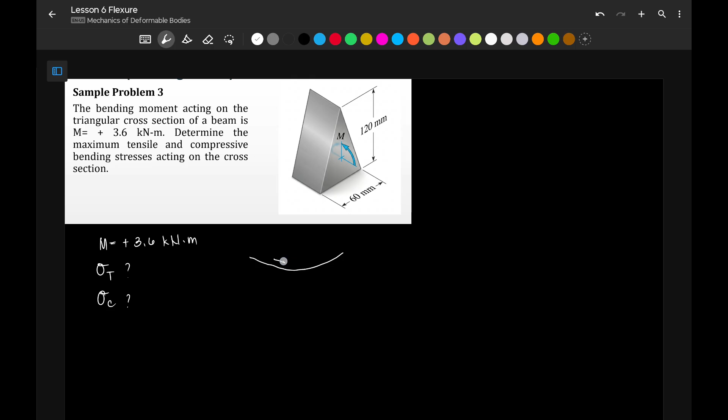So what we're looking for is the maximum tensile and maximum compressive stresses. Since our moment is positive, our beam tends to smile. So the fiber on top is under compression, and the fiber at the bottom is under tension.

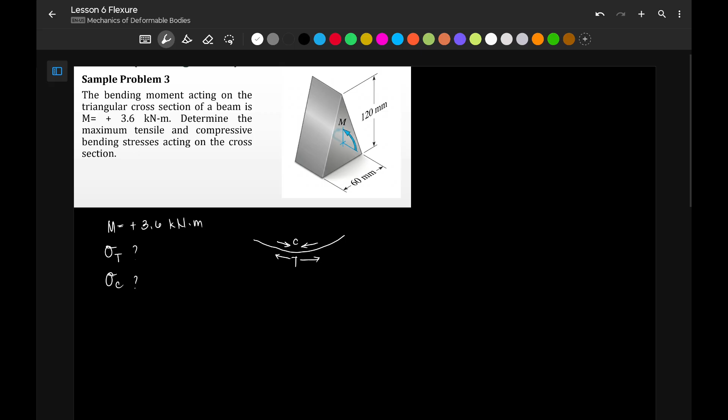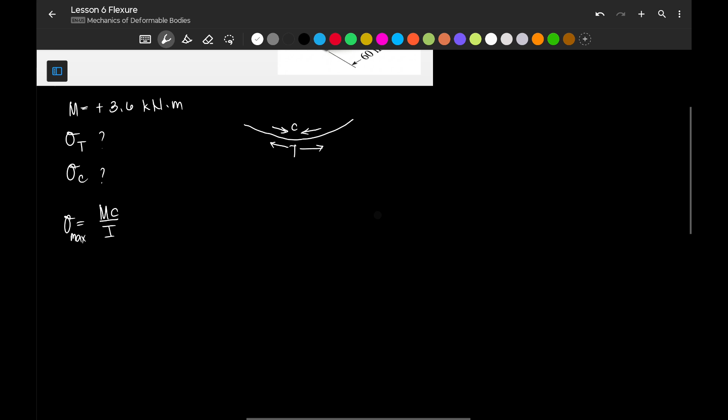Our cross-section is a triangle. So the formula for stress is simple, that is just MC over I, since we are talking about maximum stress. So let's get our I and our C for the triangle.

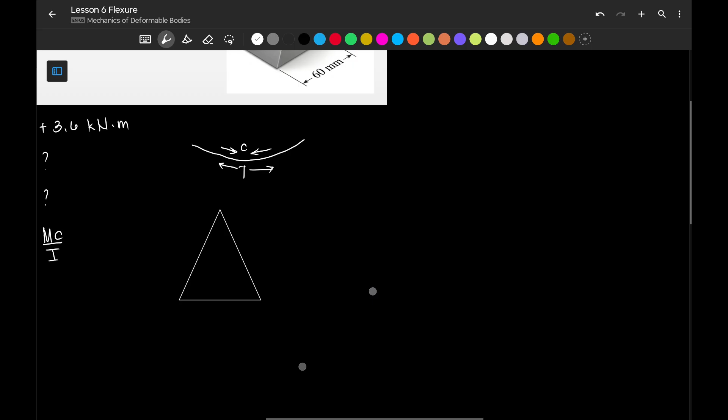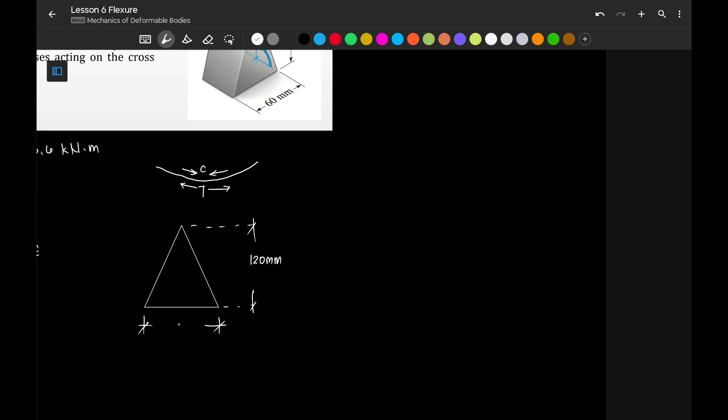So this is our triangle. The height of our triangle is 120 mm, whereas our width is 60 mm. Now, based on our understanding of centroids and moment of inertia, we know that the centroid of this triangle, which is our center of mass or center of gravity, is located at 1/3, 2/3 - 1/3 coming from the peak, so this is 1/3 of the height, and this is 2/3 of the height.

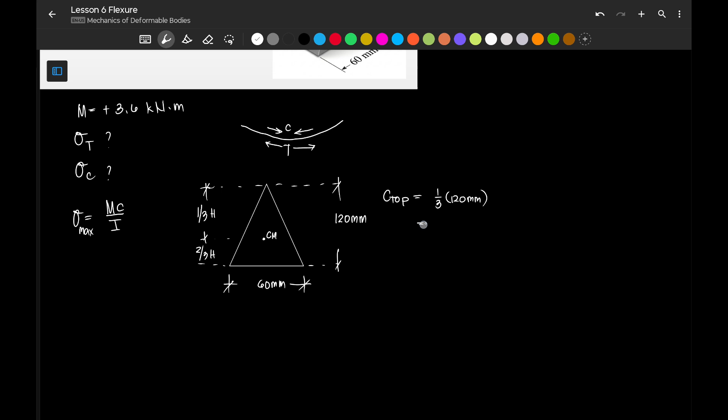Therefore, our C-top is 1/3 of 120 mm which is equivalent to 40 mm. That is our C-top. And then our C-bottom will be the 2/3. Wait, I switched them - so this is the 2/3, this is the 1/3. So this should be 80, and this one is 1/3 of 120 mm. Why did I make the bottom larger?

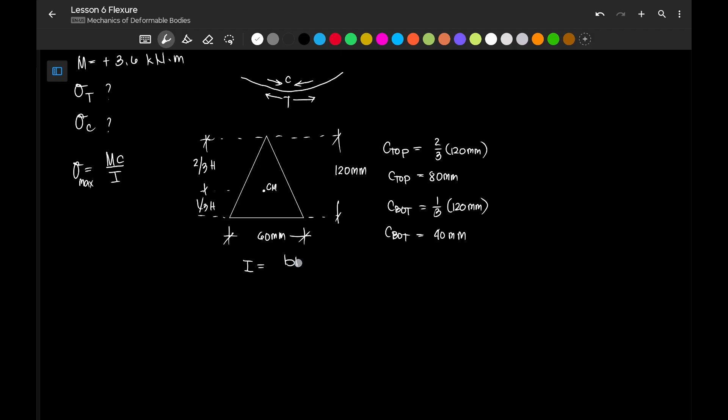So C-bottom is just 40 mm. Okay, let's get our I. The moment of inertia is BH cubed over 36. So the base is 60 mm multiplied by the height of 120 mm cubed, over 36. So our I will be 2.88 times 10 raised to 6 millimeter to the fourth.

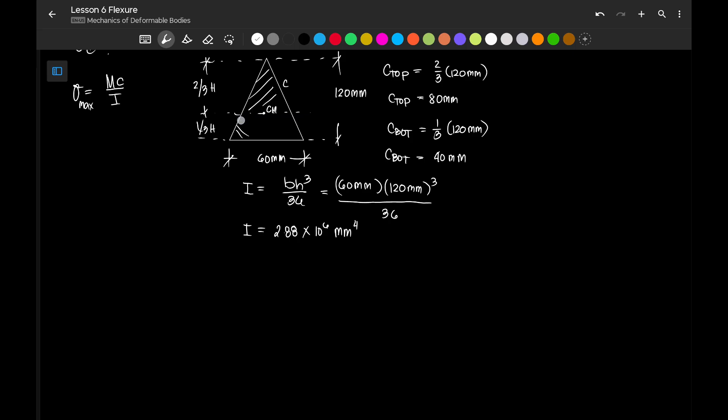So when we're asked about stress, since our stress calculations will be separate, this will be split into our top fiber which will be under compression, and our bottom fiber which will be under tension because our bending moment is positive. So let's start with the top fiber. On the top fiber, our stress becomes...

The moment is 3.6 kN-m, we multiply it by 10 raised to 6 to convert to newton-millimeter, multiplied by our C-top which is 80 millimeter, divided by our I of 2.88 times 10 raised to 6 millimeter to the fourth. Cancel the units, millimeter squared remains, newton per millimeter squared, that is megapascal. Let's remove the times 10 to 6. So what's left is 3.6 times 80 over 2.88.

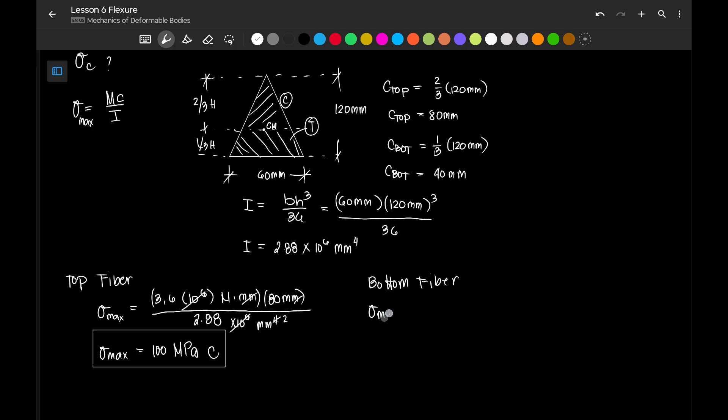We have 100 megapascal, and that's under compression for our top fiber. Now for the bottom fiber, our maximum stress becomes - we just change C. We don't change the section, and we don't change the moment, so we only change our C.

So this time our C is 40 mm, divided by 2.88 times 10 raised to 6 millimeter to the fourth. After cancellation of units, it becomes millimeter squared. Let's remove the times 10 to 6. So our maximum stress becomes, since it's like halved, 50 megapascal tension.

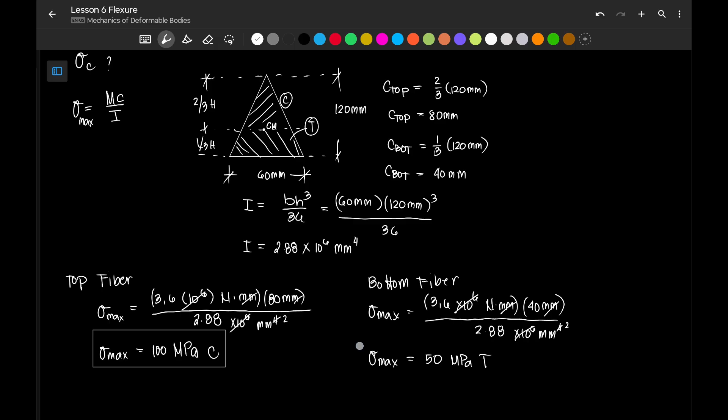So that's how simple this problem is. What's important is to remember the formulas for moment of inertia and centroids, and the location of centroids - that's very important for this topic. Alright, that's it for this one. See you on the next one.

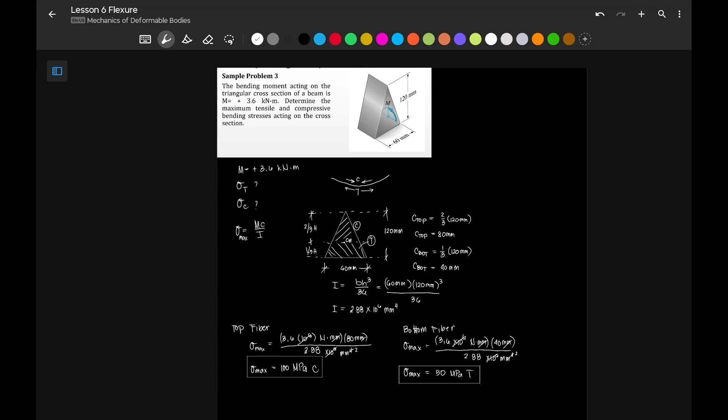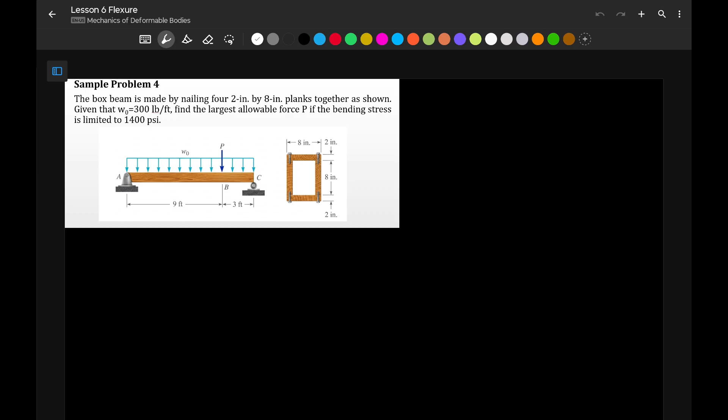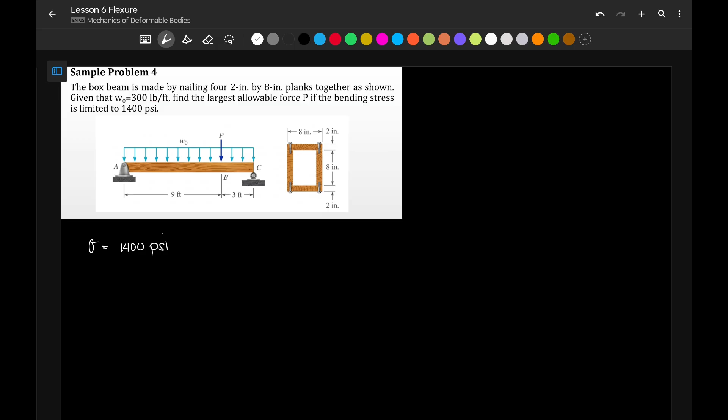Final sample problem on flexure. It says here, the box beam is made by nailing 4 2-inch by 8 planks together as shown. Given that w0 is equivalent to 300 pound per feet, find the largest allowable P if the bending stress is limited to 1,400 psi. The problem doesn't indicate if this is for tension or compression, so let's assume it's applicable for both. So we have a box cross-section.

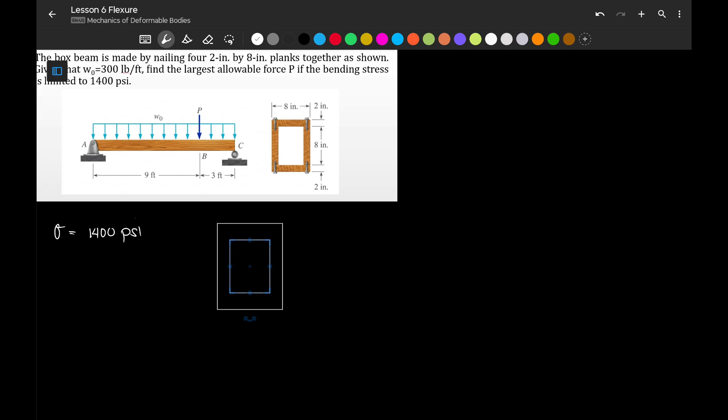Okay, so this is our cross-sectional area. Since our box is symmetrical, our neutral axis is at the center. So let's identify the dimensions we have. Coming from the top to the neutral axis, the distance is half of 8 inches, which is 4 inch plus 2 inch, or 6 inches. So at the bottom, it's the same, 6 inches, since they're symmetrical. On this side, we have 8 inches.

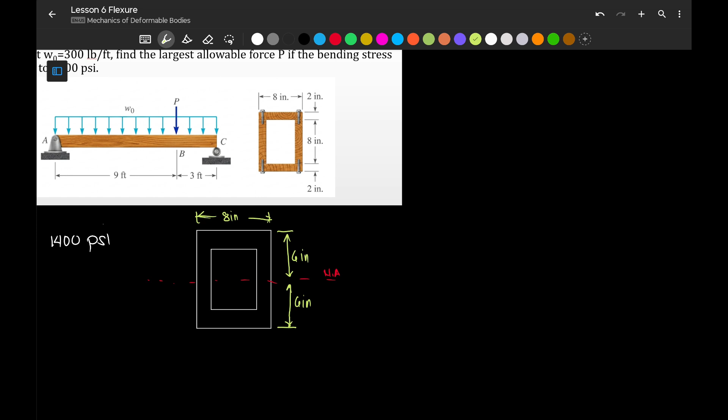Okay, so this is the dimension of the box, and the interior of our box, if this is 8, each window here is 2, this is also 2. So what's left inside is 4 inch, since we subtract two 2's. And the height of the interior will be 8 inches. Okay, that's given by the problem. This is 8 inches up to here, but this one here, that is 8 inch minus 2, that's 4 inch.

Okay, so let's get the value of C. The value of C is equal on top and bottom, 6 inches. Now for the moment of inertia, this is BH cube over 12.

But since it's hollow, we need to get the whole section, then subtract the BH cube over 12 of our hollow section. So in this case, our I becomes: the base of the largest rectangle is 8, the height is 12 cube over 12, minus the small hollow inside, which has a base of 4 inch, and a height of 8 inch cube over 12.

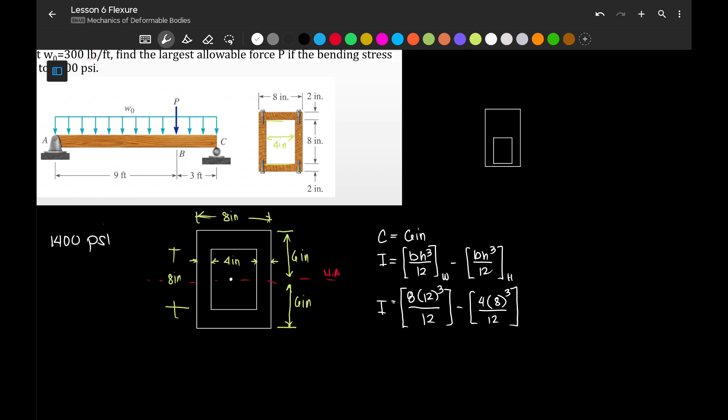So we can't use this technique. We need to use the transfer formula. Our transfer formula is: moment of inertia is equivalent to the summation of I plus A D squared. So we need to use that to determine the moment of inertia. In this case, they're aligned at a single centroid. So our I is

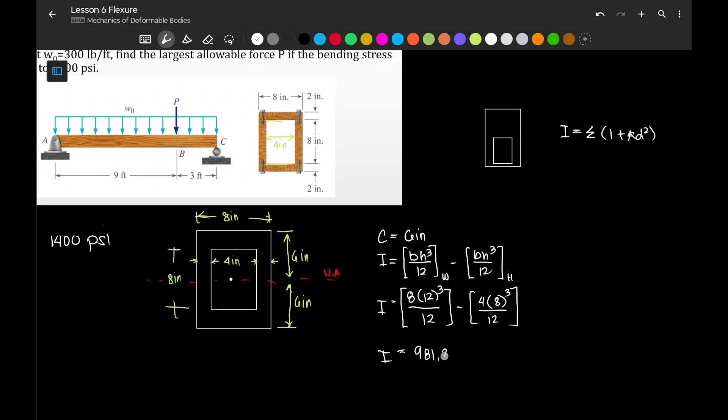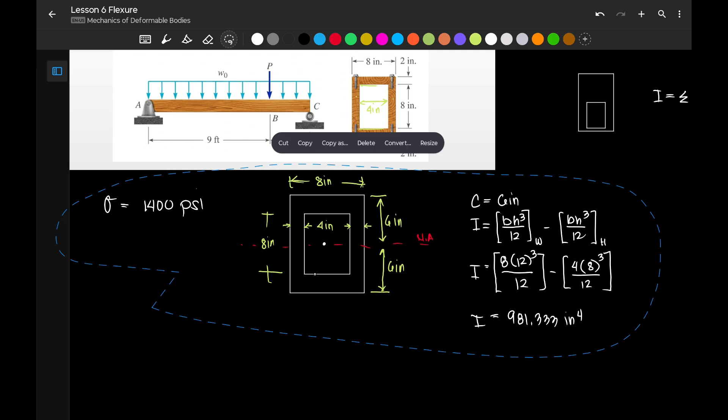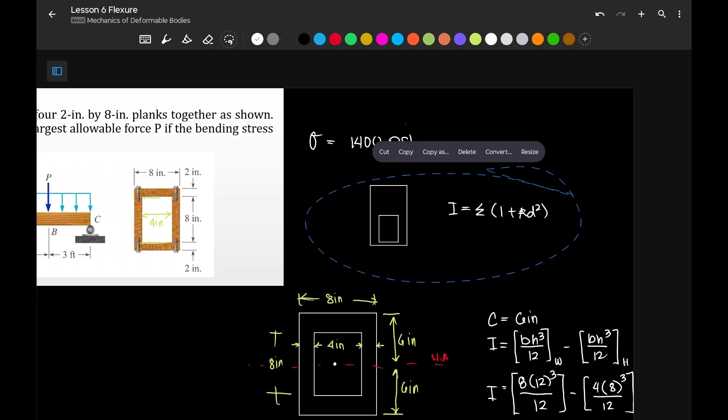Let's move this here. So this we can delete already. Okay, so let's draw the moment diagram starting with our shear.

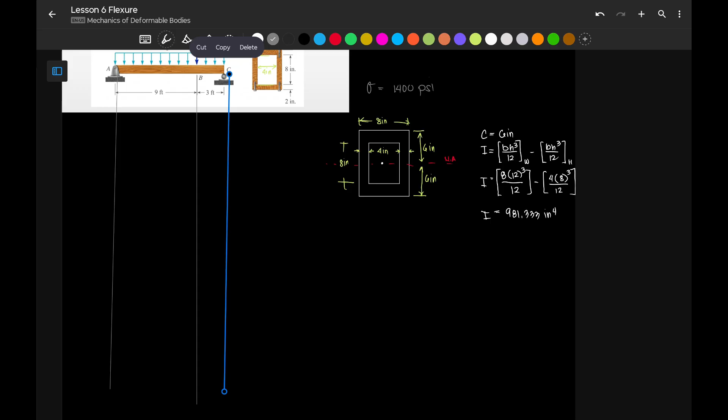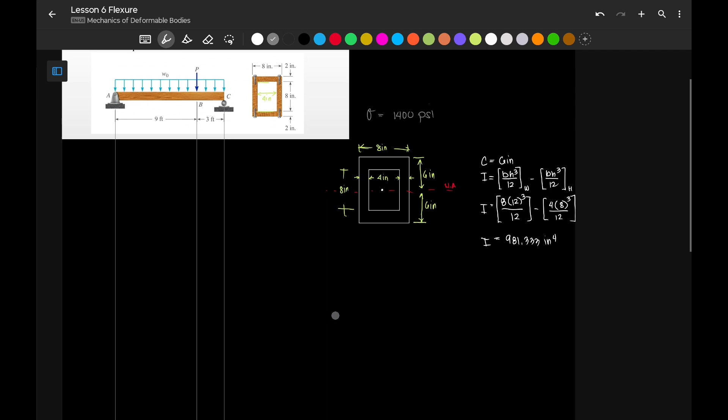Okay, but before we can proceed with the shear, we need to first find the reactions here. What are the reactions at our supports? It's simply supported, and our uniformly distributed load is 300 pounds per foot. So let's solve for the reaction.

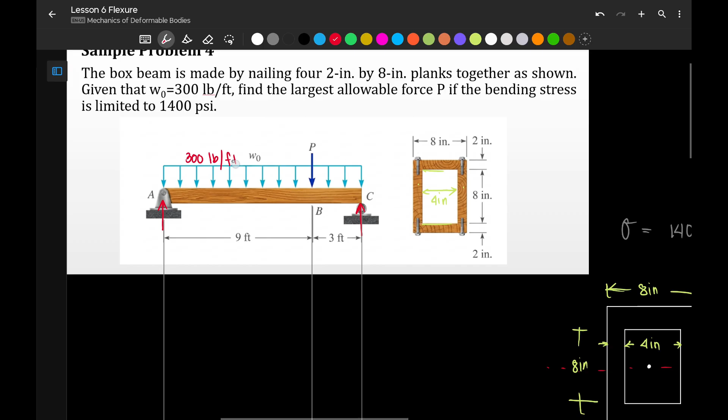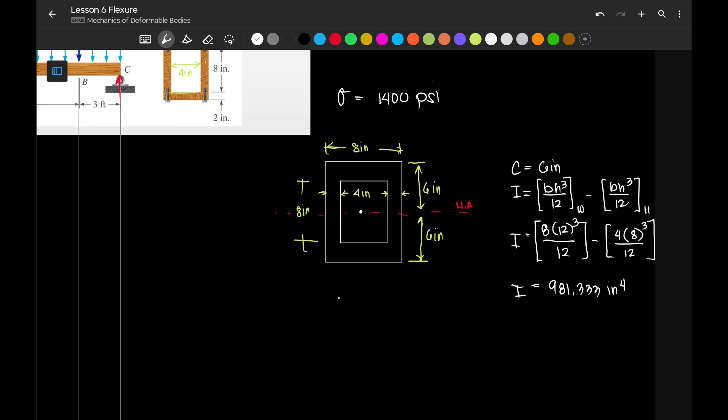Let's take summation of moment at A. I'll place it up here. So let's take summation of moment at A equivalent to 0. Okay, let's assume that clockwise is positive. So what we have here, we have P with a moment arm of 9 feet, plus we have 300 pound per foot, multiplied by its length of 12 feet, then its moment arm is half of 12, so 6.

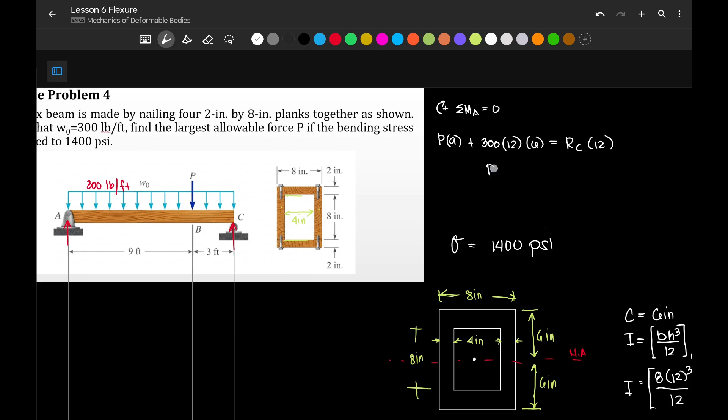And that is equal to the reaction at point C multiplied by 12. So our reaction on C is... Okay, so P is still unknown since that's what the problem is asking for. So what we can do is make cancellations, 9P plus 300 times 12 times 6, that is 21,600, divided by 12. So the unit here is pounds.

So let's simplify. If you have 9 over 12, that would be 3/4. So the reaction here is 3/4 P plus 21,600 divided by 12, which is 1,800. Positive, so they're both positive, but again, this is just the reaction so far.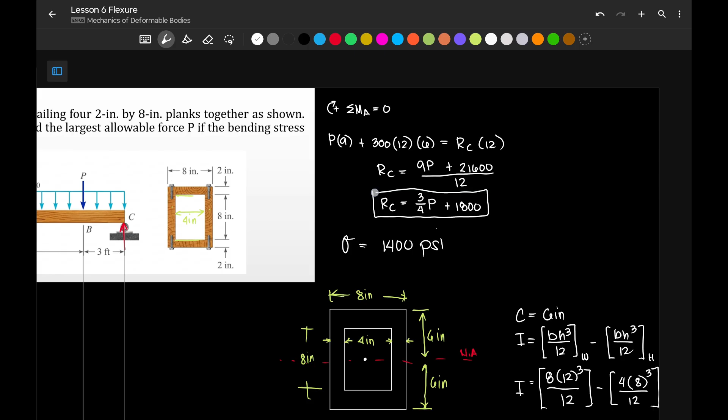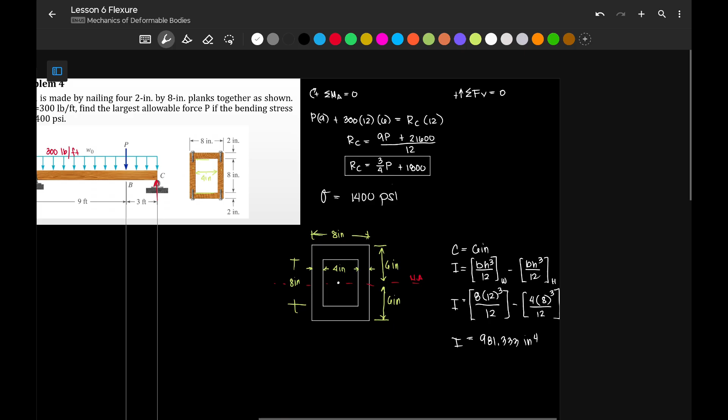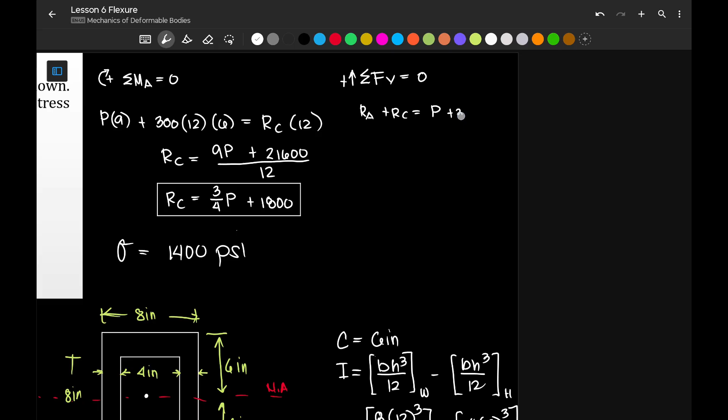Okay, so to determine the reaction at A, let's take summation of forces vertical equivalent to 0, assuming upward is positive. So our upward forces there are RA and RC. So RA plus RC equivalent to the value of our concentrated load P plus the 300 with a length of 12 feet. So what's left for us, since we already have the value of RC, RA is equivalent to P plus 3,600.

P plus 3,600, then isubtract natin yung value ng RC which is 3/4 P plus 1,800. Importante ang parenthesis dito, kasi pag walang parenthesis, magiging plus yung ating 1,800. So our RA is P minus 3/4, this is 1/4 P. 3,600 minus 1,800 magiging plus 1,800. So this is our reaction for A.

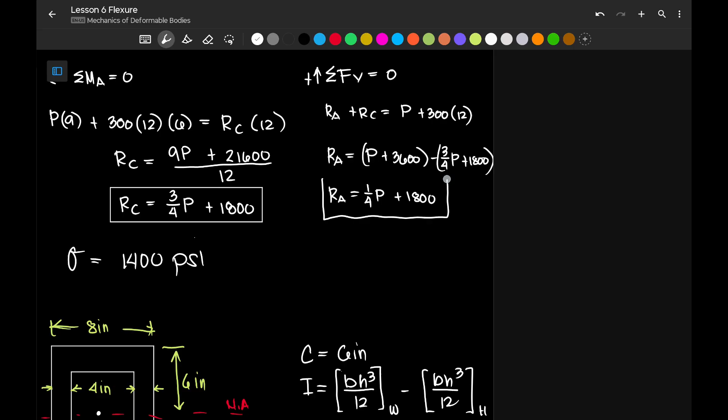Basically, ang nangyari lang, yung uniformly distributed load, pinaghatian nila, tig 1,800 sila. Pero pagdating kay P, si point A, ang kinikerry lang niya ay 1/4 nun, while si RC naman, si point C, ang kinikerry naman niya ay 3/4 nun.

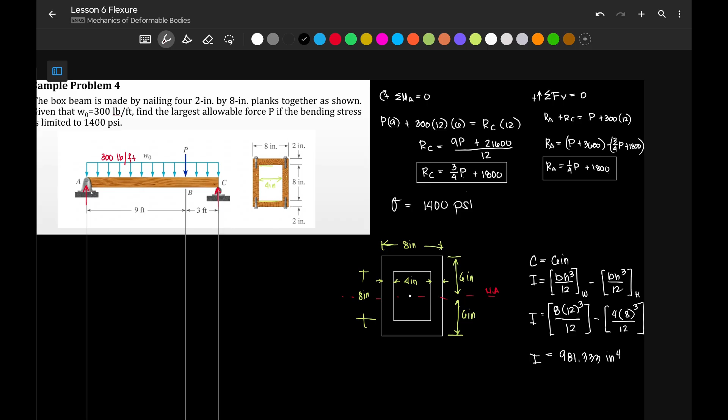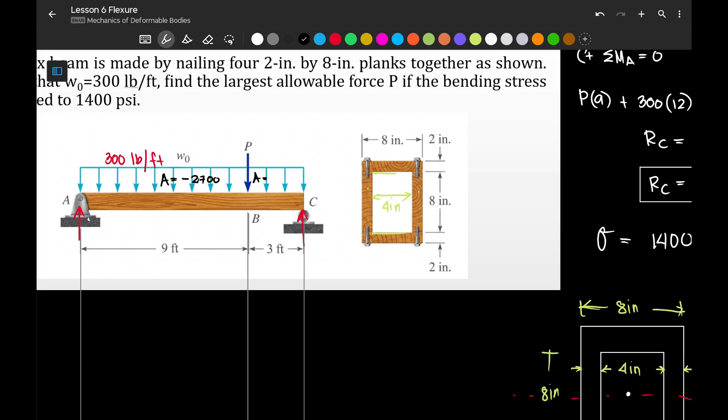Okay, so from here, we can now plot our shear diagram. Kunin natin yung area. Yung area sa point na to, sa 9 feet lang, 300 times 9, we have negative 2,700 dito. At yung area naman sa side na to is 900, negative 900.

Shear diagram tayo muna, SFD, shear force diagram. So our length is in feet, then our shear is in pounds.

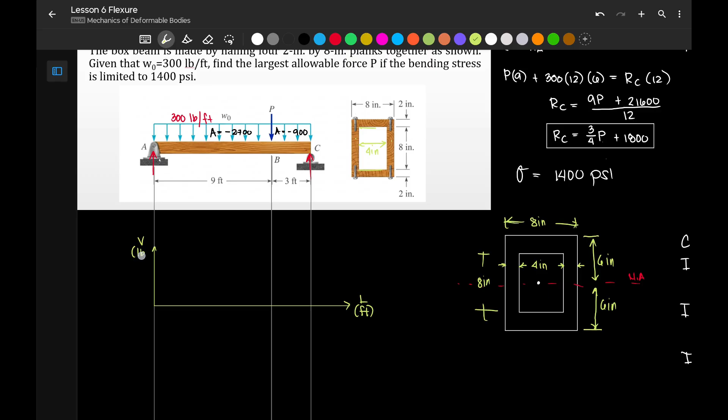So at point A, may reaction tayo, positive 1/4 P plus 1,800. Hindi natin alam yung value ng P, pero that is greater than 1,800. So assume na lang tayo na nandito, this is your 1/4 P plus 1,800. So aangat yung ating shear diagram to this point.

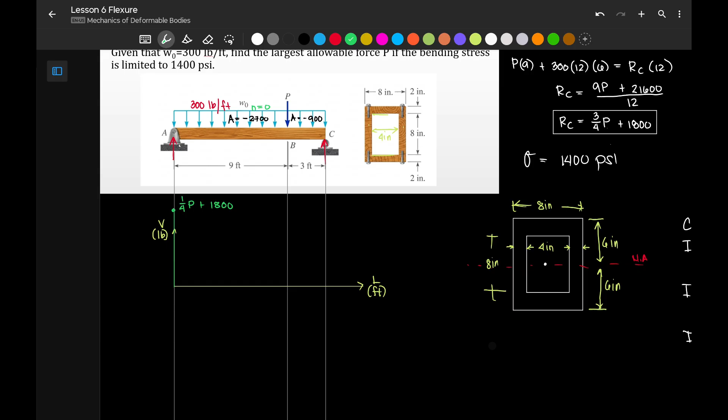Next, degree here is 0, so we can expect that the next line is a slanting line. So the area is 2,700. 1,800 minus 2,700, that is negative 900. So ang shear natin sa point na to, sa point B, shear at point B is 1/4 P plus 1,800, tapos meron daw tayong change na negative 2,700. So the shear at point B is just 1/4 P minus 900.

Hindi natin alam kung mas malaki sa 900 yung 1/4 P, kasi kapag yung value ng P natin ay greater than 3,600 pounds, ibig sabihin positive. Pero kapag ang value ng P natin is less than 3,600, negative. So hindi natin muna alam yung value. Ang gawin na lang muna natin, i-assume lang muna natin na greater than 3,600 yung value ng P. So positive yung magiging result.

So nandito, so we have here 1/4 P minus 900. Let's connect the dots. So this is 1/4 P. At exactly point B, bababa daw tayo ng P, so kunin muna natin yon. So at point B din, meron tayong 1/4 P minus 900.

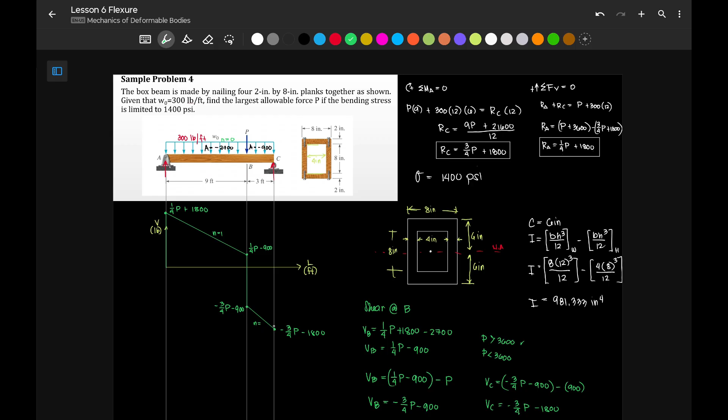We have here a degree of 1, N is equal to 1. At point C, may reaction RC tayo, which is 3/4 P plus 1,800, closing out our shear diagram. So ito na yung ating shear diagram.

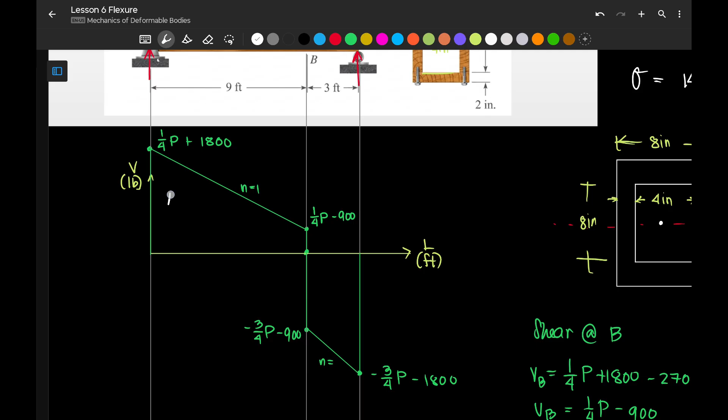Ngayon, itong point na to, this is the location of zero shear. So possibly nandyan yung ating maximum moment, kasi ito positive moment, ito negative moment. Kunin na lang muna natin yung area nito, what will be the area of this one and what will be the area of this one. Yung area nito, ng left side, kunin natin.

Yung area ng left side natin becomes, this is a trapezoid. So 1/2 ng, ang height natin on the left side is 1/4 P plus 1,800, plus yung height naman natin on the other side is 1/4 P minus 900, multiplied by our length na 9 feet.

So, therefore, our area on the left side is 1/2 of 1/4 plus 1/4, 1/2 P plus 1,800 minus 900. So, positive tayo, multiplied by 9. So our AL is 9/2 times 1/2 of P plus 900. So this is our area for this one.

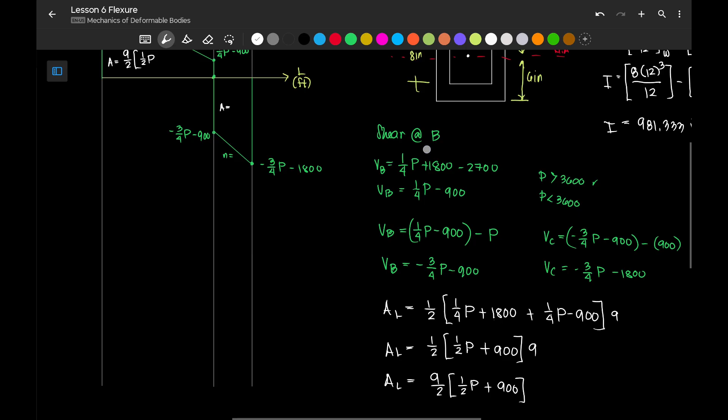So we have 9/2 multiplied by 1/2 of P plus 900. Okay, hindi pa natin kasi alam yung value ng P. Ngayon, actually, pwede na tayong tumigil dito. Meron na tayong maximum moment. Ito na yon, okay?

However, i-check na lang din natin doon naman sa right side. Ano yung magiging area ng ating right side? So the area of the right side would be 1/2, i-remove na muna natin yung mga negatives. Gagawin na lang natin mga positive muna ito para nang sa ganon, hindi tayo mahirapan. Ilabas na natin kaagad yung negative. So lahat ng minus na to magiging plus. We have 3/4 P plus 900

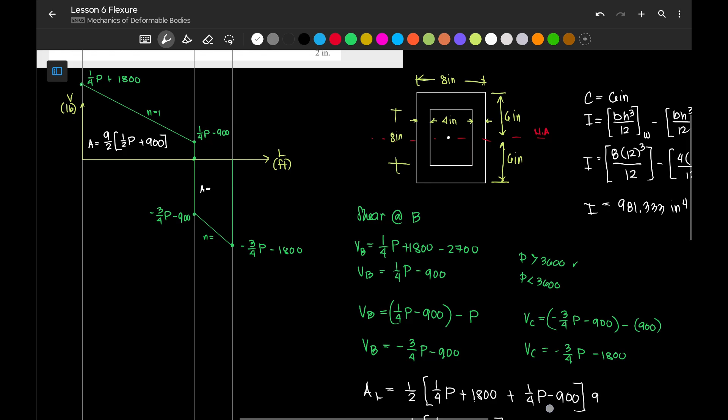plus we have another 3/4 P plus 1,800 multiplied by the length na 3 feet. So our area on the right is negative 3/2 of two 3/4, that is 6/4 P plus 2,700. So this is the area on the right.

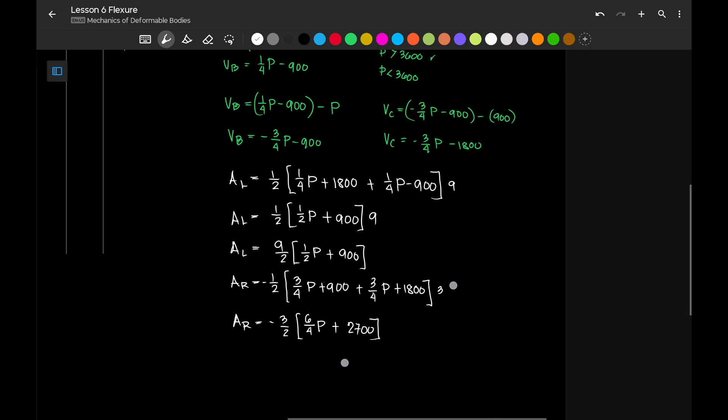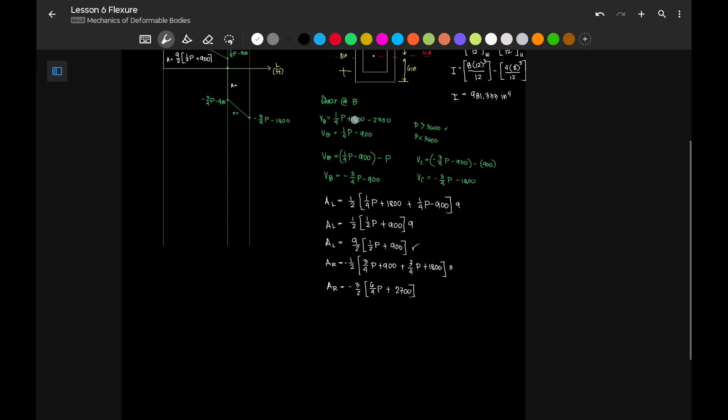Supposedly, this should be equal pero hindi na natin to ipoprove. We are now okay to use either one of the two. Okay? So kunin natin ngayon yung ating bending stress. So since dito yung maximum moment natin, pag i-drawing natin yung moment diagram, kung nakuha nyo na yung maximum moment, kagaya nito, nakuha na natin yung maximum moment, hindi mo na sana kailangang i-drawing yung ating moment diagram.

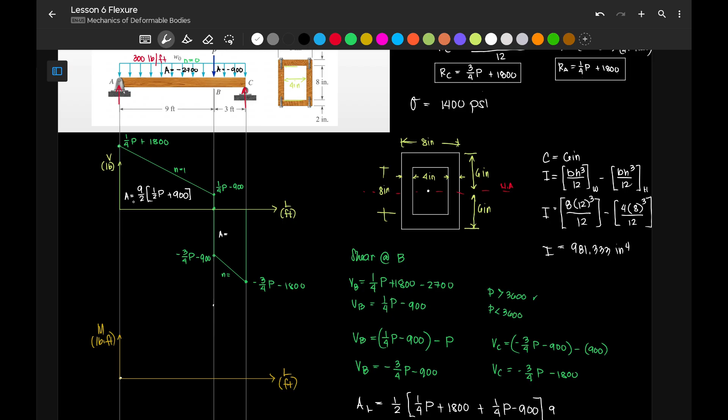Okay, kasi meron ka naman ng value ng moment. So ano yung ibig kong sabihin? So ito, pound foot ang unit natin. Diba, meron tayong pin support dito. So ang moment dyan ay 0. Then, at this point, ang area natin ay 9/2 multiplied by 1/2 plus 900. So itong curve natin na to ay pag ganito, kasi positive decreasing, and ang magnitude ng ating maximum area is this.

So ito yon. Copy, paste. So ito yung point na yan. Tapos, dapat mag-i-equate sila sa 0. Kaya sabi ko, dapat equal yung dalawa na yan. Okay, so kaya naman natin pag-equalin yan. Pero for now, hayaan na muna natin siyang as is na ganyan.

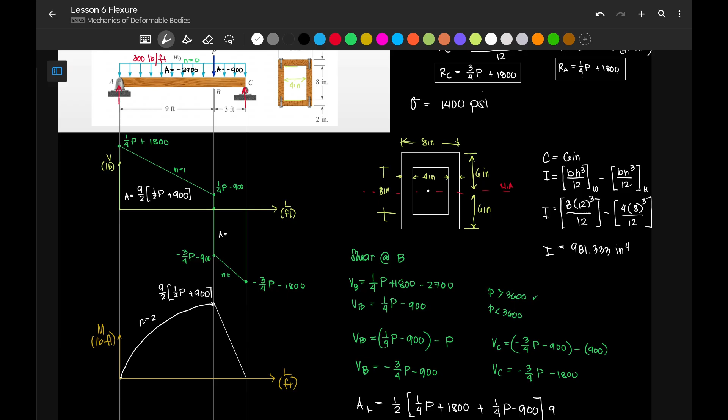N is equal to 2. Kasi na-determine naman na natin yung maximum moment. So our maximum moment is 9/2, 1/2 of P plus 900.

Okay, so our stress daw is limited to 1,400 PSI lang. So 1,400 PSI. Since stress is equivalent to MC/I kasi we are talking about the maximum, therefore our 1,400 pounds per inches squared is equal to the moment na 9/2 multiplied by 1/2 of P plus 900. Take note, ang unit nito ay naka-pound foot. Pound foot, so kailangan natin i-multiply sa 12 para maging pound inch. Okay, multiplied by our C. So our C is 6 inches.

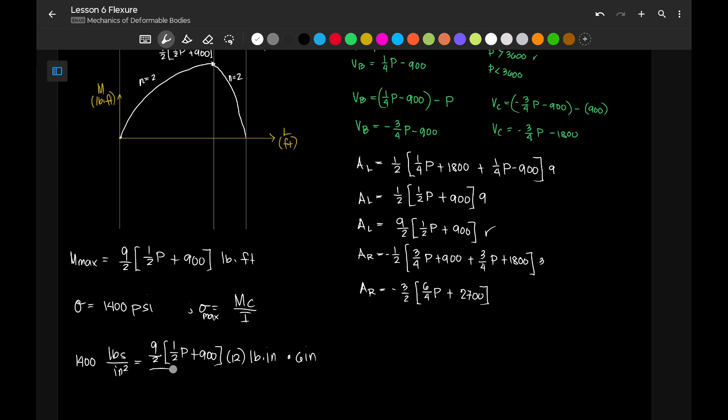And then our I is 981.333 inches to the 4th. So the value of P is 1,400 multiplied by 9/2 times 1/2, P/2 na lang to. P/2 plus 900 times 12 times 6 divided by 981 inches to the 4th, 0.333. Shift solve.

So dito, inassume na kasi natin na ang unit ng P in pounds. So the value of P is 6680.655 pounds. So this is the value ng P.

Now, itry natin naman using the negative side, using the right side rather. So the maximum moment now, kapag yung right side ang ginamit natin, this should be equal to 3/2, 6/4P plus 2,700. Okay, same ng parameters, mababago lang ito, no? So our 1,400 pounds per inches squared is equivalent sa 3/2 ng 6/4P plus 2,700 multiply ulit natin sa 12 para maging pound-inch na lang siya, times 6 inches divided by

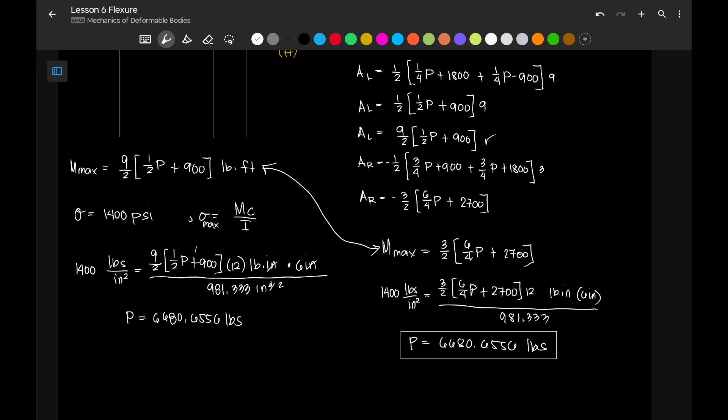So in this case, na-prove natin, since similar yung value ng P, equal lang yung dalawang moment na to. This one and this one should be equal. Okay, hindi na lang natin minimize. So the value of our P is 6680.6556 pounds. And that's it for this problem. So we will further discuss the flexure when we are discussing the horizontal shearing stress.